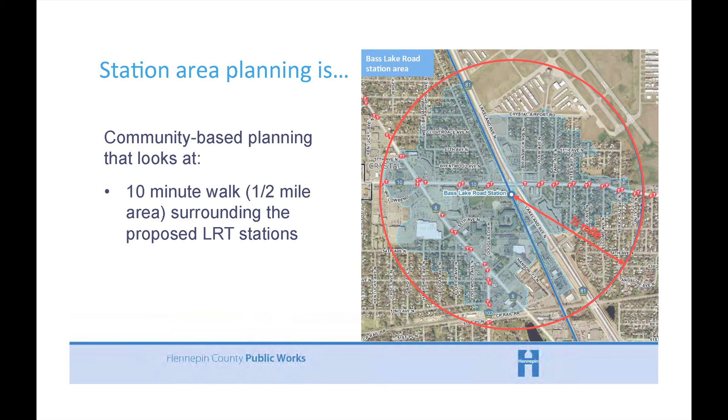A lot of you have heard this before: station area planning is a community-based process that looks at that 10-minute walk area around each station. It looks at a couple of things.

It's basically creating that long-term vision. What you're going to see tonight is some things that can happen short-term in the next 5 to 6 years when the line opens, but a lot of what you're going to see are things that could happen 15, 20, 25, 30 years out. It's really about how to make the most of the light rail investment, and also how it supports community health.

There are 3 key things we're looking at. One is connections. One of the things we heard a lot about from the community at the June 17th meeting is how do we make sure that pedestrians, bikes, cars, and buses can get to these stations, so how do we improve those connections as we look forward. Creating great places. And then also land use.

What about the lands around the station, what do people want to preserve and build on from those great things that currently exist? What are things over time that could change? That's what we've been looking at this week.

And once again, with community health, that's one thing the county is really committed to, and a lot of communities along the line. How we design our neighborhoods can really impact making it easier for people to live healthier lifestyles. So that's also being incorporated as we do this process.

So tonight you're here to hear an update on the station area plans. On Tuesday, October 20th, the project office will come with more information about the engineering and the light rail line itself. Then, based on your input tonight, the design team will go back and make revisions, and we'll be back to present a revision of the plans you're hearing tonight on November 4th at the Community Activity Center.

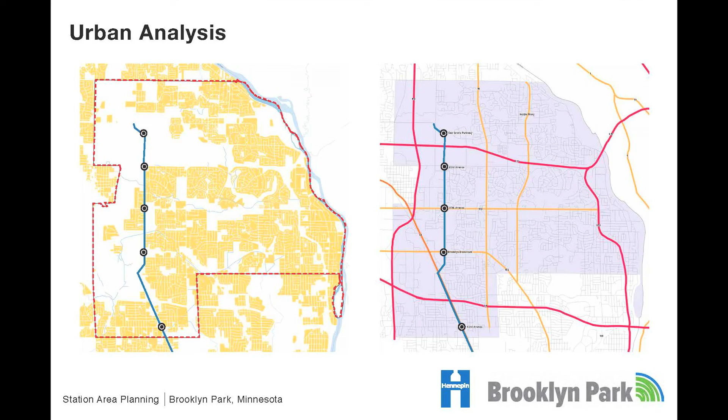And we do need to remember that the light rail line as planned runs up West Broadway. West Broadway is a main street, but it also is on the western side of your city. And it is very close to Highway 81, Bottineau Boulevard there, and other interstate connections, which is part of the reason that some of the land uses there that we're going to talk about that are not residential are so healthy. They're there for a reason, and we don't think they're going to be changing anytime soon.

There's an ongoing city pedestrian and bike study by Community Design Group that is a concurrent study, and we're going to use that information in our report. We're not going to recreate the wheel on that.

There's a draft, which we'll talk about in just a minute, that you can take a look at. Also, Nelson Nygaard is doing a station area 10-minute bike shed study. What that means is they're doing a study where you can ride from a station, which many folks are likely to do, who do choose to ride light rail on a recurring, regular basis, are likely to ride 10 minutes. They're less likely to ride more than that. So the 10-minute study is how you get on a bike and ride. It's not as the crow flies.

And then S.B. Friedman is doing a market study, and this is very important. We do not like doing hypothetical or pie-in-the-sky planning. Our practice really relies on market studies to project what the available types of land uses will be in the future. So we don't come in and create crazy plans that scare everybody, and hopefully we won't scare everybody tonight because that's not our intent. But by doing things hypothetically and then asking a market consultant, what do you think? Our process is to get a market study done.

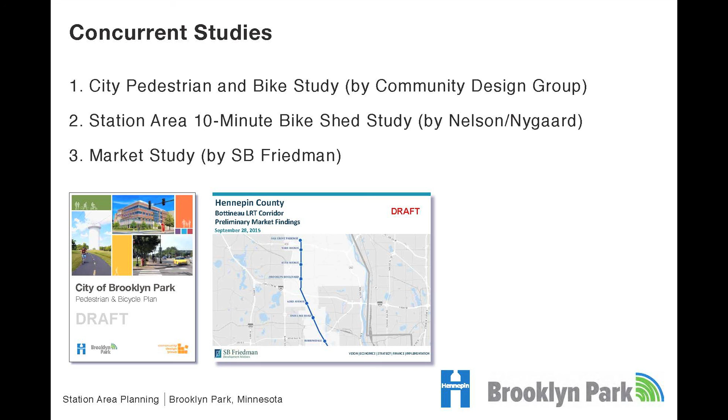So the pedestrian and bike study, I don't want to spend too much time on this other than to tell you this is out in the 30-day comment period. And the website is up there, brooklynparkpedbikeplan.org. You can make comments on the draft if you would like to. There's a lot of very good information in there. We'll be waiting until we get the final study before we incorporate that into our report, and they'll be done, I believe, for the most part by the end of October, but everything will definitely be finalized by the end of the year.

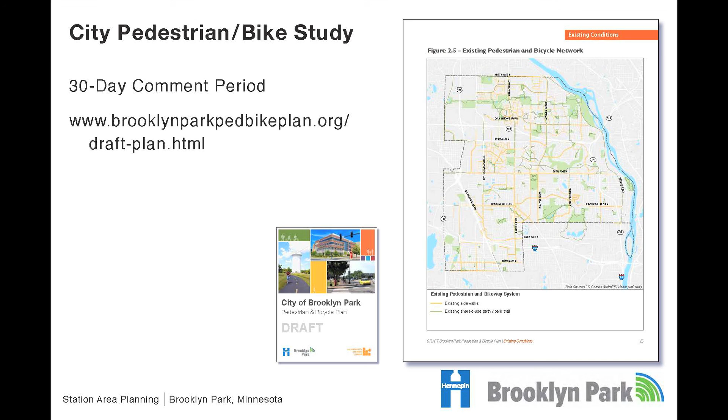And as it goes to the market, I can give you a brief summary of opportunities, which is there's probably more demand for a variety of different types of uses in Brooklyn Park than you have available land. And depending on your perspective, that's a good thing. Change is always difficult, and you still have undeveloped land that is being developed, and different folks land on different sides of that issue. But there are limited available sites.

Besides at Oak Grove, and even at Oak Grove, it looks like a lot of land today. It's not going to look like a lot of land in 20 years. But there's limited sites for major new development and redevelopment in the near term. There's pent-up demand for multifamily housing, market rate multifamily housing. There's pent-up demand for a variety of types of housing. It's not just one type, like say for families. Seniors, there's a tremendous amount of demand for seniors.

Greenfield development is less expensive in your community than redevelopment. And this is very important to understand. It's much easier to develop on a site right now in your community that does not have a building on it than it is to purchase something, take it down, and build something else. You see a little of that going on here, but in general, a lot of the development that's still going on in Brooklyn Park, because you are a suburban community that has available land, is on new sites.

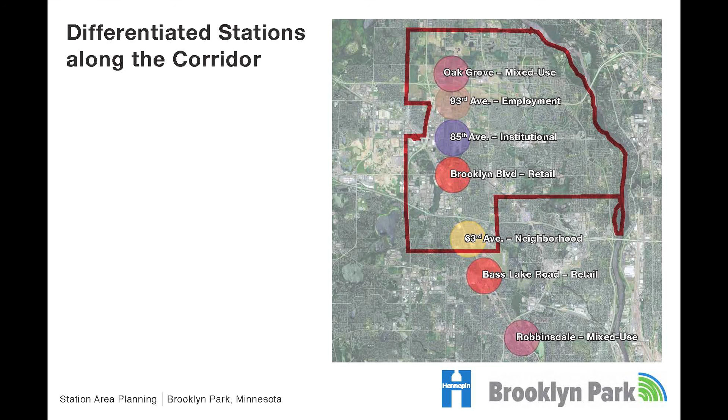But what's going to be different tomorrow than today, or 6 years out when light rail comes, is that today we have auto-oriented arterials that run through the main part of your community. In the future, the autos are going to share the right-of-way with other modes of transportation. So we're going from an auto-oriented arterial to a multimodal Main Street, in a sense, where autos are going to be complemented, in addition to the buses that are there today, by light rail, pedestrian movement through better pedestrian connections, and bikes.

The city has a Parks and Open Space, or Recreation and Parks master plan, which already anticipates creating or completing trail connections through your community. The Rush Creek Regional Trail at the top of your community is a major amenity, and the Crystal Lake Trail, which is built to just past the 63rd Avenue Transit Garage today, is a major amenity, and that's going to actually connect along the LRT right of way all the way up to Rush Creek.

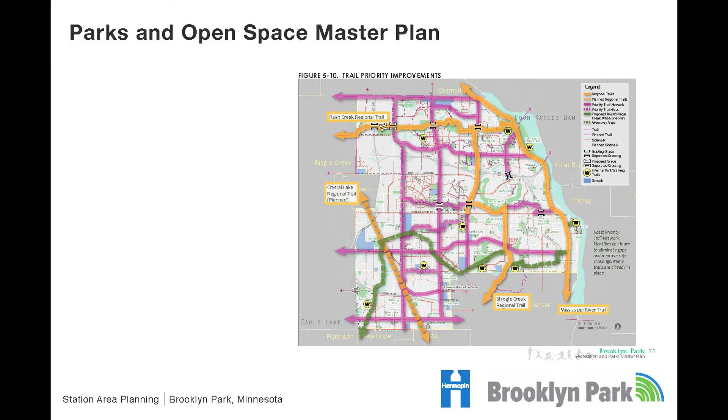And then we also have the Mississippi River Trail as another main trail. But there's a whole other trail network that your policy documents are already working on completing, and we think this is something that should definitely be supported. It'll probably take another 20 years, but it is a good long-term project for the community.

On policy, one of the things we think you should consider is that as county roads are rebuilt and widened into 4-lane divided roads, we would recommend a 10-foot multi-use path rather than a 5-foot sidewalk continuously along all of those. It's already proposed along West Broadway all the way up into the Oak Grove transit stop, and it will connect all the way up to the Rush Creek Trail.

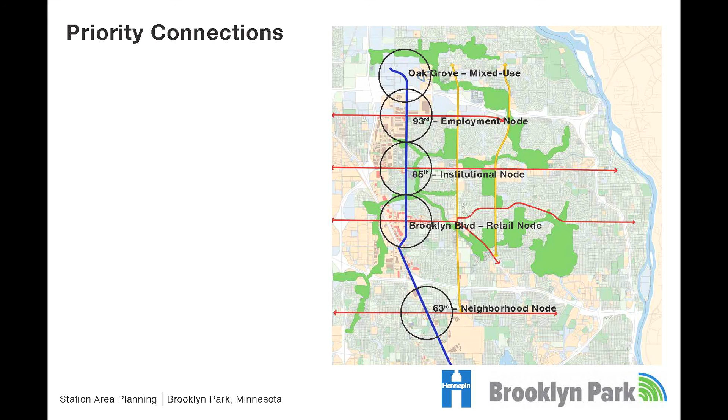We would also recommend that on these red lines, that same pattern be taken east and west. The county road folks are thinking about that, and we think that will provide more direct connections between the more organic trail network, which at the vision scale we think is very important.

So now we're going to talk about the stations, and we're going to go south first and work our way north. We'll start at 63rd Avenue.

63rd Avenue is not on West Broadway, it's on Bottineau Boulevard, and that's a big street. We dimensioned it, and the width from the right-hand side of this image over to the left, from the Crystal Lake Trail to the other side of the heavy rail track right-of-way, is 260 feet - just about the length of a football field, which is impressive. And you have to cross numerous lanes of traffic to get there.

So in the focus groups we had, pedestrian safety and circulation is a main concern. On the north side of this intersection, there's an island where a number of people we met with have been stranded before - they didn't make it across all the lanes of traffic before the light turned, and there's no protection there.

There's also no button, so you have to wait until you can go again, until you get the light to cross the other 5 lanes, to get to the pork chop island, to get across a right-hand turn lane, then the LRT tracks and the heavy rail. It's like American Ninja Warrior out there, really, if you like that show. It could be a competition site. But how pedestrians get across is really, really important there, and we paid a lot of attention to that.

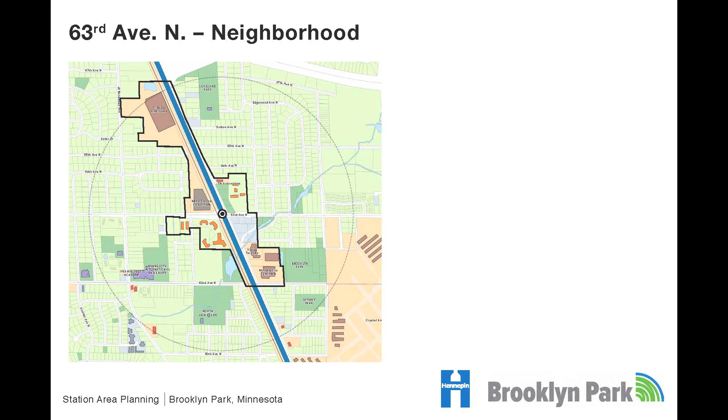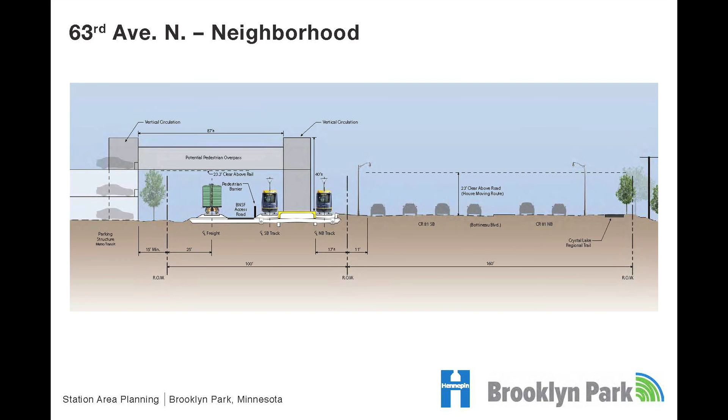So one of the things we did, and you'll see this with each of the stations, is we asked ourselves, in the city, what are the opportunity sites? Here are the sites that were identified. We break it into short-term, 5 to 15 years, and long-term, 15 to 25 years or more. Short-term here, there are opportunities behind that parking garage on Metro's parking lot site, we believe, and we'll talk about that in a minute.

And then on this triangle-shaped site, which is wrapped by roads but was cleared with the reconstruction of the highway, there's an opportunity for some development on vacant land there. For the longer-term redevelopment, we talked to the owners of some commercial properties just below the triangle, and they said with the reconstruction of the highway and the adding of 2 lanes, it's tough for commercial there to get in and out, and they would probably be better located in another place.

So that is a potential long-term change of use. We also noted that to the east of the site, this is not a redevelopment opportunity, but there's some very deep lots, and it might be possible to do a zoning overlay to allow the owners there more flexibility in what they do. Again, that's a policy issue, up to you, but it's in proximity to the transit, and the lots are extremely, unusually deep there compared to what's around them. That's just an item of discussion. We haven't drawn anything for those sites.

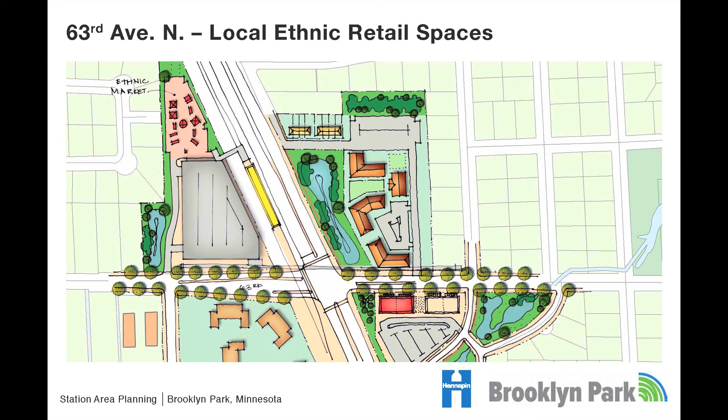This is zoomed in on a detailed plan showing the proposal for the local ethnic marketplace, back behind the garage and the retail center in red on the Triangle site, within the near term—say, 15 years. One thing we learned about this area is that approximately 20% of residents do not own cars, so it's a high percentage of folks walking, and that bridge would really benefit them. It also supports other local retail uses, and there isn't any other retail at that intersection—it was removed with the reconstruction of 81, and it's no longer there.

So the first image on the wall goes back behind the transit parking garage, in the paved area that's there today. It looks at what you could do for virtually no investment to create a pop-up marketplace there, using that area behind the light rail. This is a very popular use in the region—there are many marketplaces, but there isn't one in close proximity to this area that we're aware of. It has an advantage in that the bridge connects you to light rail, and from light rail back to the marketplace. So something for you to think about and discuss.

Moving along, the next station is Brooklyn Boulevard. The predominant land use is retail at that station today, and there are very few vacancies. We know the vacancies that exist are going to be filled up with new uses. We met with the retailer where two large uses around the corner from Cub had their leases up and moved to another location, but they have new uses going in. This is a very healthy retail node—the city refers to it as a commercial node, a very important one. Just about everybody we met with shops here regularly, whether it's CVS, the grocery, Target, or whatever.

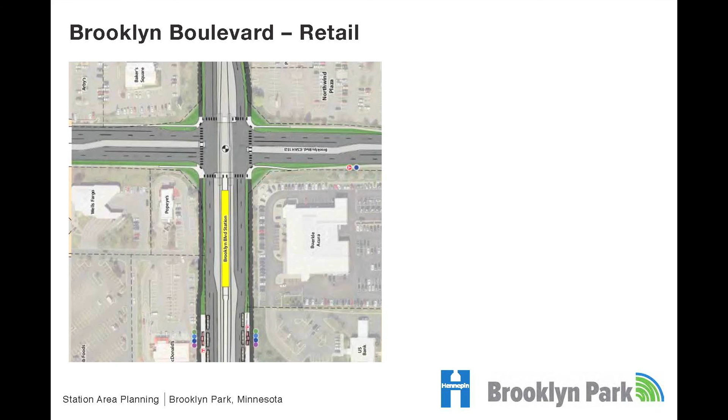At this location there will also be buses, down at the lower left by the bottom of the Acura dealership, as you go across the street to McDonald's. That's where the bus stations will be, staged out on the street for the most part. There's a transit loop that will remain backed by Cub Foods, but out here on the street, this is the project's designed bus shelter for the station. It'll sit right next to the bus pickup area on West Broadway, and behind it there'll be a 10-foot multi-use trail running up and down the line on both sides, illustrated with both cyclists and pedestrians.

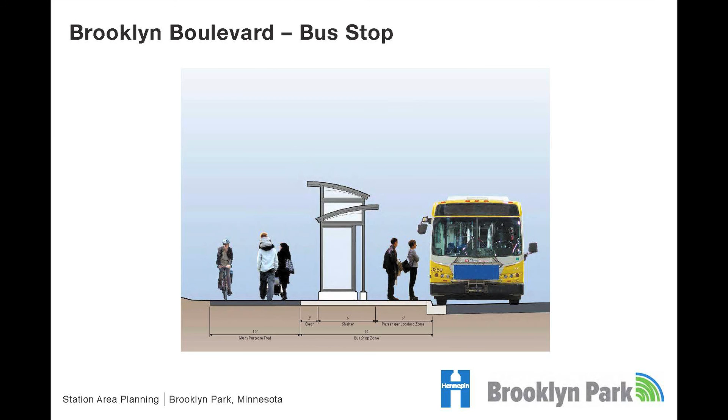Folks are shocked, and we were a little surprised too, that there are very few opportunities at this area. I'd say we'd even be pushing the envelope to say any long-term opportunities are in anybody's thought process today. In the short term, there are some vacant sites—one across from the community college next to the church, which I think the church owns, that's still vacant; an opportunity site where the light rail comes over, right below Target, where there's a vacant parcel for lease and a vacant store; and a little city site behind the Acura dealership.

And that's it. In talking to the landlords, they don't foresee redevelopment in the short term. So what we have, just like in other places, is that the vacant land or vacancies are the opportunities. It's worth explaining why we won't see a lot of redevelopment here unless something changes—many of us have borrowed money for a mortgage before, or for other things.

These properties have been here for over 30 years, and most of these owners don't have mortgages anymore. They own these properties, and that means they can be much more flexible with the tenants they have. They can have more small businesses, and the rents are very diverse, which makes for a great shopping environment down there. The owners are happy with the mix they have, and there are more tenants that want to go in here than there is available space. That's just the truth about this area. So the owners aren't excited about redevelopment; everything's working fine for them. The businesses down there are happy with the traffic, and everybody's excited about light rail because it adds more traffic.

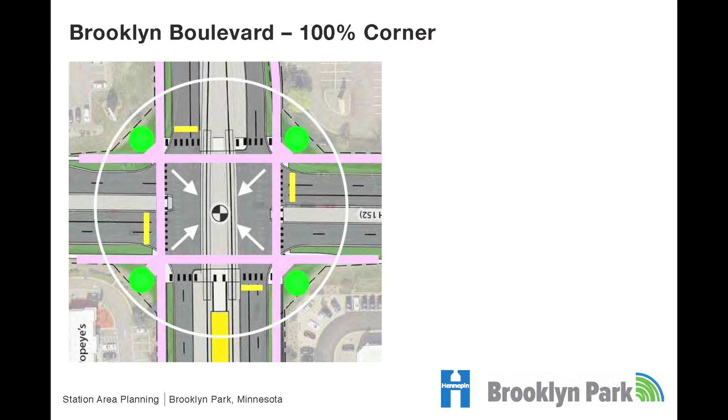Going back to the bigger picture, we have not done any master plan drawings over any properties here, because we didn't find one owner who said they would be interested in redevelopment, barring unforeseen changes in market forces over the next 20 years. I'd give you CVS as an example. That use is about 4 years old, and it's a 20-year or more lease. That's a great anchor for that center, and the owners there are very happy.

But if things were to change, this brings up a key point for the city. If you want to have things change there, it would have to be a change of policy that would drive it. Either that area would have to be zoned more flexibly to potentially encourage things to happen—we're not sure even if you did that in the next 15 years things would change there—or there has to be public investment to make that work. If you would like to see a different kind of development there, those are the kind of things that would be required.

I think coming in there was an expectation that what a lot of us associate with transit-oriented development would be a place that would happen because there are so many great commercial uses there. Wouldn't it be wonderful if you could have mixed-use development where you could live there if you were a senior, go to the drugstore, go to the grocery store, and be able to take light rail to the community college or downtown. Your whole world is within easy reach, and maybe you don't have a yard to take care of anymore.

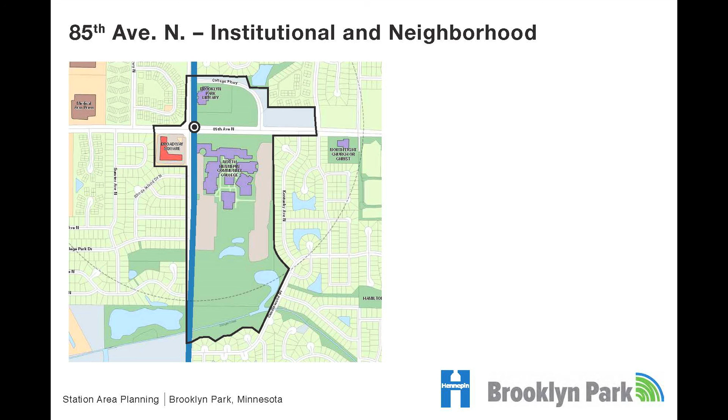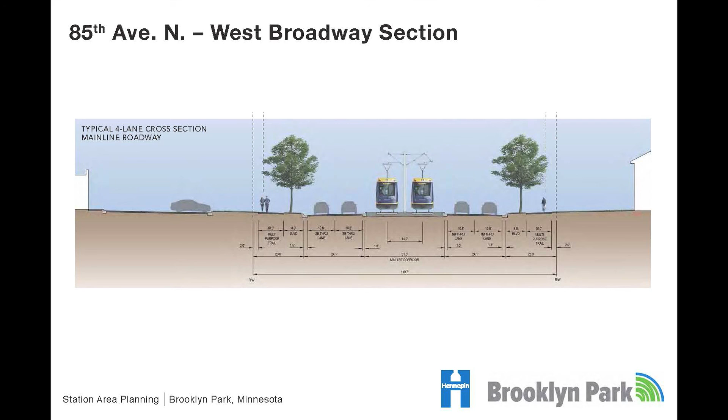The opportunity sites here are largely vacant land. In the short term, 5 to 15 years, which is the plan that the Community College presented, is for new civic plaza space in front of the new library, the beautiful new county library that's being built across the street. It was always hoped that there would be a civic space right below that, and part of the plan is to make that vision come true.

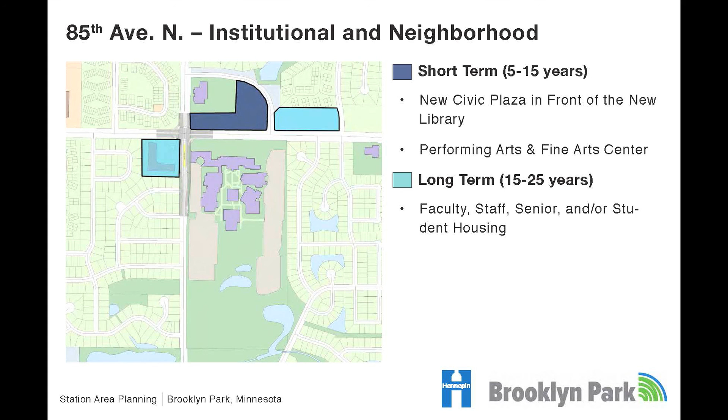So the station area plan here in dark purple illustrates the community college's proposed expansion, which includes a new administration building out on the corner, which will actually orient out to the intersection rather than focusing inwardly the way it does today. On the north side of 85th, we can see in dark purple the library, which is currently under construction. And the vision is for performing arts use, a performing arts center, and arts-related uses on the north side of the street.

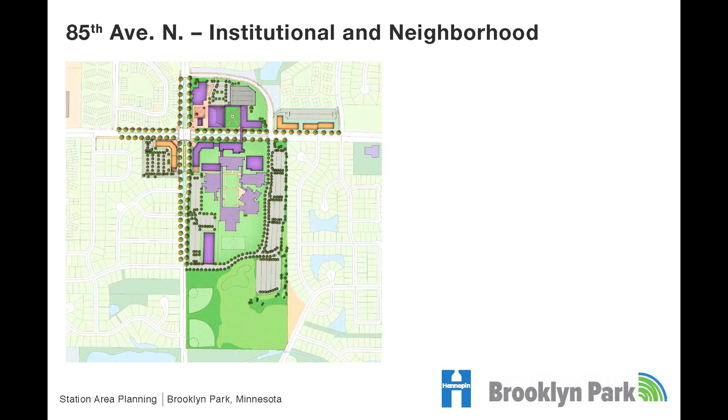We have a little detailed plan of that here. The concept would be to create a civic plaza at the corner with an enclosed pavilion building, a small building just below that, which would provide visibility and access to the library when you're coming north as a pedestrian, on your bike, or from the light rail. Next to it, we've illustrated a performing arts building, and the academic building is the L-shaped building on the other side of the quadrangle, and a small parking garage which may be needed.

We did meet with the library representatives. They said maintaining some surface parking for them is very important, and we've put that back in the plan. That was not in Monday night's plan that was presented, but we've added that back in.

Then in the orange on either side, we've shown complementary uses. That could be mixed use. It could be staff and faculty housing. It's probably more challenging here to do any kind of retail in the future. It's never been a retail hub, and it's definitely an institutional hub now, but a small amount of ground floor retail might work here.

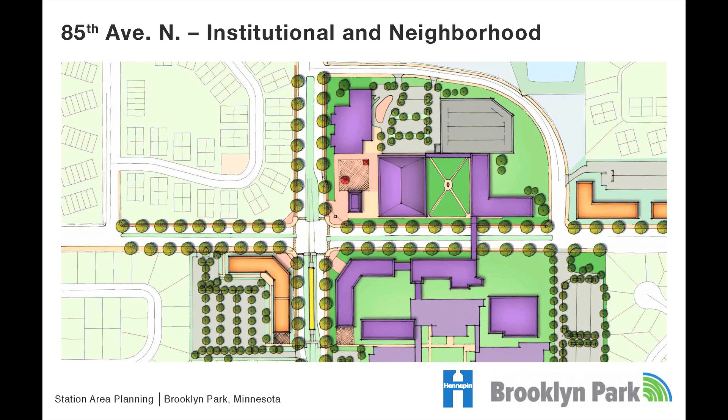This is an illustration of what that might look like. I should say, before we get ourselves in trouble, the light rail platform itself doesn't have a design yet for how the canopy and all that would work, so this is our artist representation of that. I don't want to get a call from the project office tomorrow saying, what were you thinking? But if you like that, you can let us know too. So you can see the new gateway, the plaza, to enter the proposed academic building here at the community college, and then looking north, you can see the little pavilion building, the iconic pavilion building, and the civic plaza, and then the new library, and the performing arts building.

This is a wonderful institution, and with the addition of the library and arts uses, it would just become an enhanced cultural center, and we think a great amenity for the community.

Down at the bottom, we're actually looking in over that other building. We would suggest that the other corner be reoriented in the future just to put the parking behind, and at the three corners create more of a civic plaza space so that you get a little bit of relief at the three intersections.

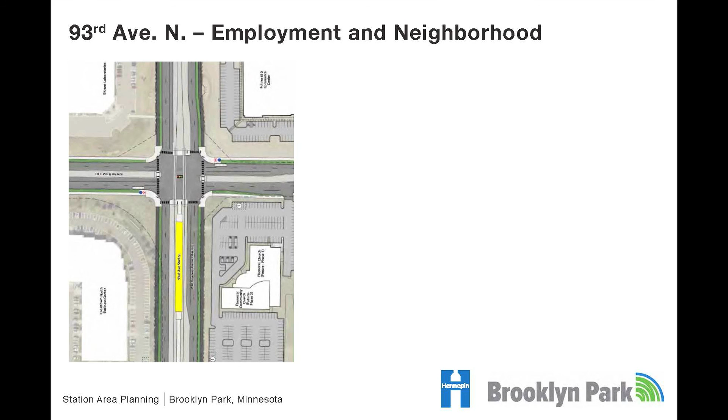93rd Avenue, the Employment and Neighborhood Center, this is the job stop. Today there's about 1,700 jobs there, very diverse. The light rail station will stop to the south of that intersection. The opportunity sites there are all in the 5 to 15 year range, and there are already plans for the majority of this space, although the owners may want to think about light rail in their development plans.

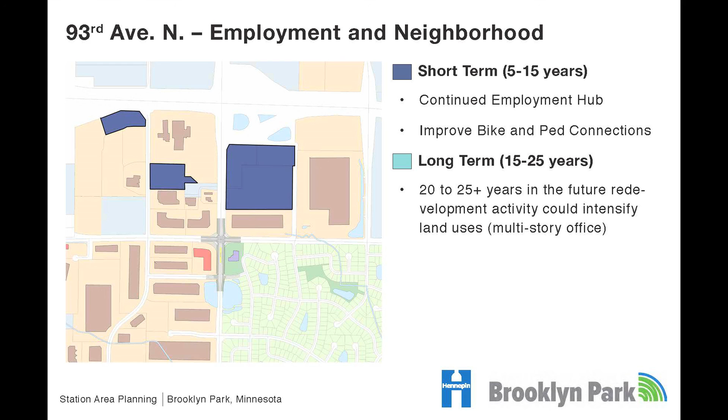So this is going to continue to be an employment hub. In the next 20 to 25 years, from a redevelopment standpoint, we may see more office uses coming in here because office and office warehouse are very similar uses. So in the future, most of this station area plan just reflects the current proposed build-out and shows the locations of the proposed buildings as they currently stand.

Before I leave this, the main improvement that's needed here is pedestrian access, and 93rd will be rebuilt with a 10-foot trail on either side. We need mid-block pedestrian access behind the car wash too. That's a 2,000-foot-long block, and there are a lot of pedestrians wandering through there today to get to work.

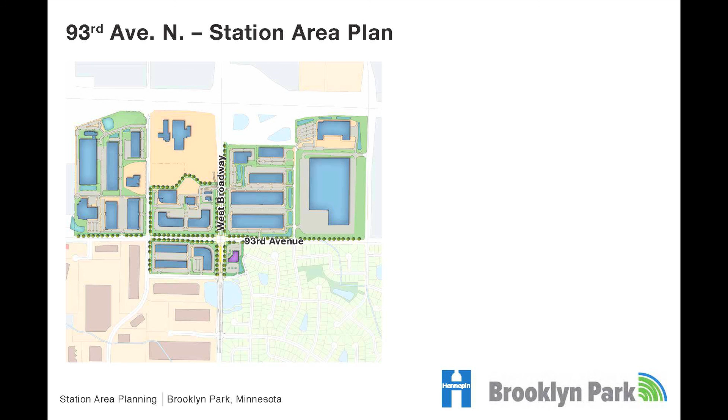And then finally is the Oak Grove Mixed-Use Center. Target has already built their first phase there.

So this is envisioned as a multi-use center, and the proposal for light rail here is you would come up over the 610 bridge, and then light rail peels off and goes to the left. The station will be on the second block up. There'll be a garage there, an intermodal free garage to park and ride. There'll be a station on that side, and then we have a very large boulevard in the middle as part of the proposal.

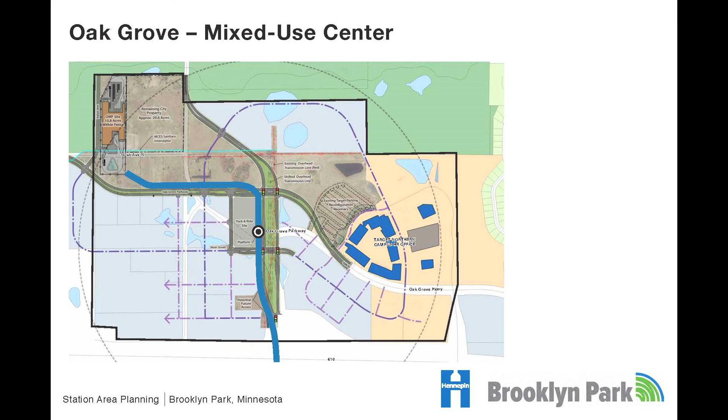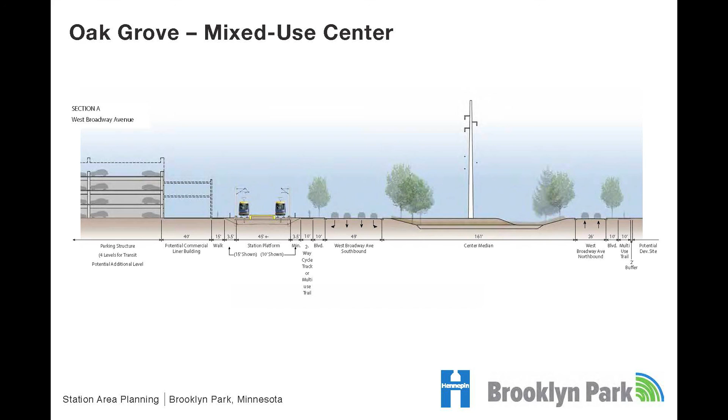This is just a detail again of the station area, so there'll be a park and ride station at this location. The concept here is to do a very wide median, in part to help hide the utility poles that run up there today, so we could put large trees on either side. It also gives us the advantage that we can treat some of the new stormwater runoff and create a beautiful termination to West Broadway in Brooklyn Park.

All of this 310 acres that hasn't been developed is really within the 5 to 15, or maybe 20-year plan. It'll be a mix of attached housing, which would be apartments and condos, corporate office, hotels, and dining and convenience retail, and that's what our market study says. But it would be heavily weighted towards corporate office.

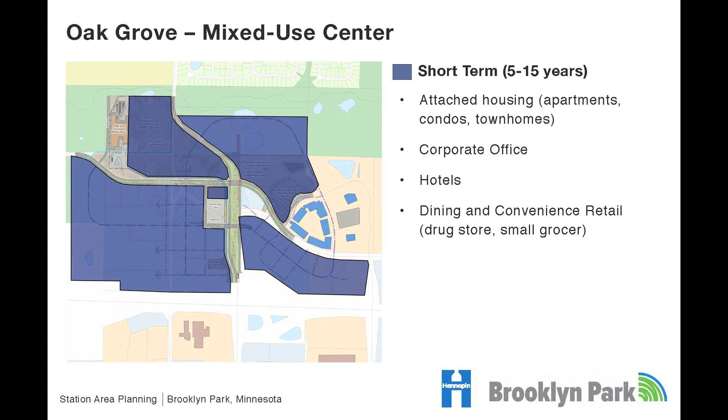The area up in the northwest corner is City of Brooklyn Park land, and an area around it that's really to be determined. It's still up in the air a little bit as to what would go there. A lot of different uses could work there. But this is a very exciting opportunity for your community that most cities don't have.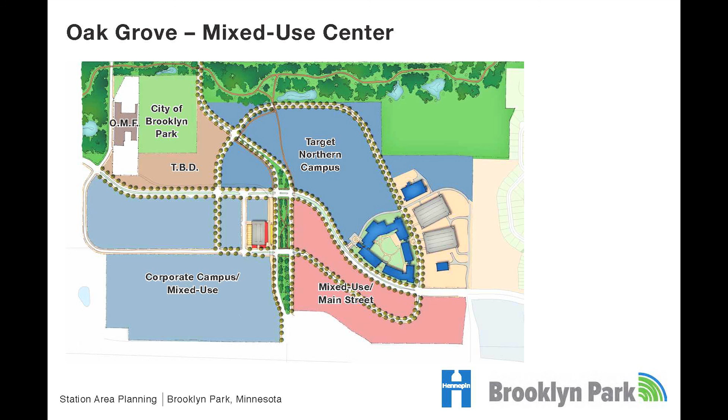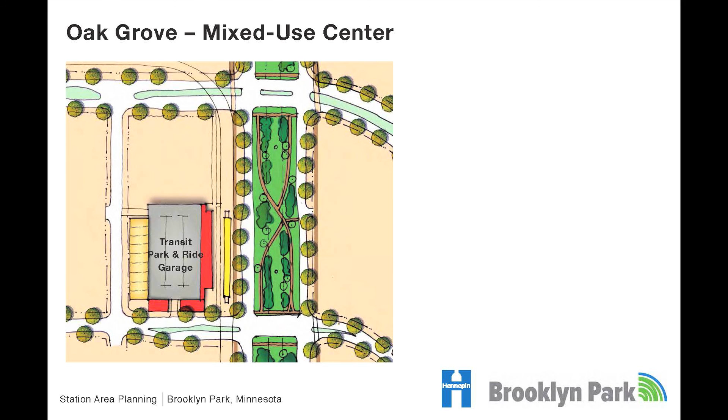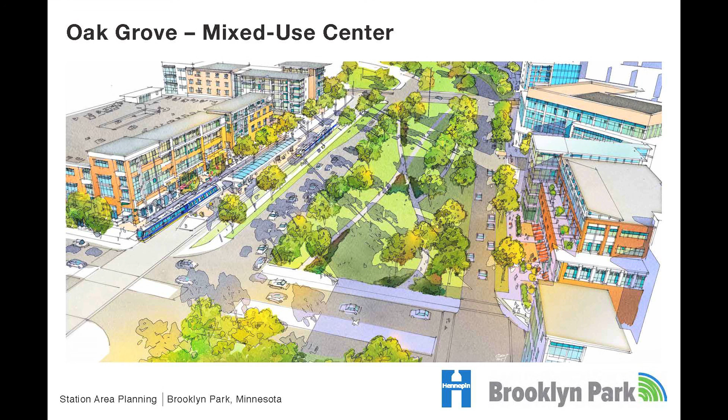The green space in the middle is really not a place where you're going to play baseball or go out and hang out. It's not a hangout space. It's a place of movement, and it's really just kind of a gracious termination as you get to the end of the line and the edge of your city. Then again, hospitality uses on the right, and Main Street uses on the right, and then the transit garage and other uses on the left.